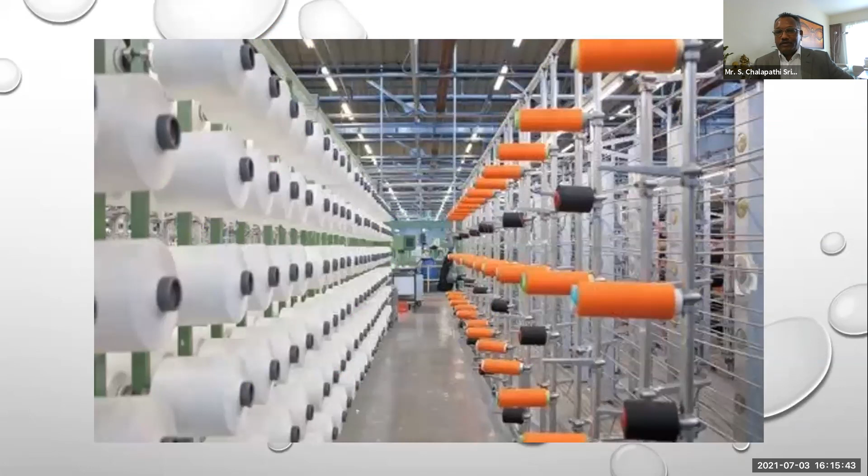Just a few glimpses of the textile industry I wanted to show in the pictures. So if you see, the first slide is about a good factory working, but the same factory, if we don't have the right type of loss minimization methods used, or we are not keeping better housekeeping, this would be the situation. Likewise, we have looms and we have massive fires.

The webinar basically here has a background to a recent fire claim which happened in Pakistan. And this fire claim had a massive impact on the economy. When I say economy, definitely the owner of the factory would have suffered a loss. But each factory, each industry supports the economy. If there is a loss in the country, the loss is to the country. This is how we see it.

And very similar fires happened in Bangladesh as well in the last 3-4 years. Luckily, in the Pakistan case, there was not much loss of lives, though the property damage was extensive. It jolted the entire Pakistan textile industry, in fact. In the Bangladesh case, we saw there is a major loss of life. In fact, a lot of women folk lost their lives because the industry is predominantly women oriented where the textile manufacturing is reported.

So what makes it so gullible?

Okay, thank you, Chalapathi. And I put my presentation up on the screen. Let me see. I'm afraid I cannot find my notes. Yeah, so Mr. Lobo is there. We can see the slides. Mr. Lobo, Usman will handle your presentation. Okay. You can stop sharing, I think. Can you put up the slide? Usman is hosting from his side. Okay. Yeah, please. Wait, George, sir. Can you put it on slide mode if it's possible? Yeah, thank you. Please, Mr. George. I was looking for my presentation. It's on the screen. No, I don't see my Word file. Sir, can you start from this slide? It has been converted. Yes. Okay.

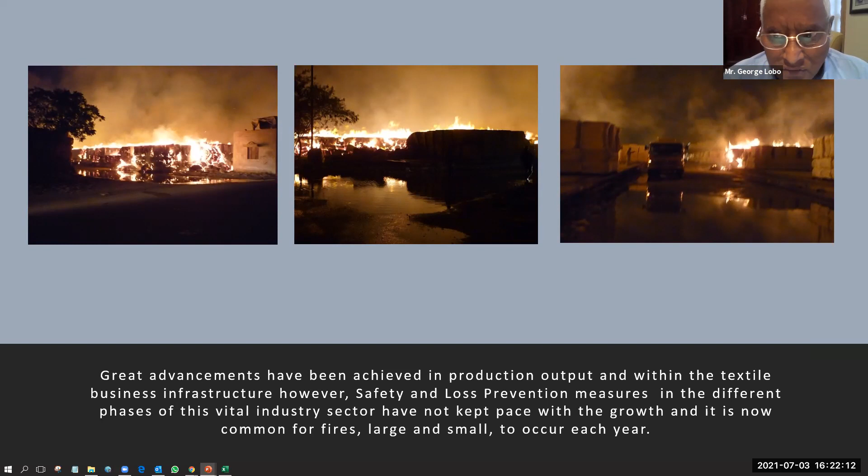Well, what I've said is that there have been huge advancements in production and various other aspects of textile, the whole industry, refinement in the industry. But sadly, safety and loss prevention measures have fallen behind. And every year we see fires, some large, some very large, almost the biggest in the world, and some small. To mitigate these losses is of a common interest to insurers, textile mill operators, and all stakeholders in the industry who contribute to different aspects of the industry.

What has not kept pace with the growth is risk management. And risk management points out various shortcomings and flaws that exist in the industry. So the way to address that is to have periodic risk inspections by a surveyor experienced in the industry and point out various shortcomings that need to be addressed. Now, this starts all the way from ginning, when cotton is brought in from the field to be ginned. And there are fires every year in the ginning industry, every single year.

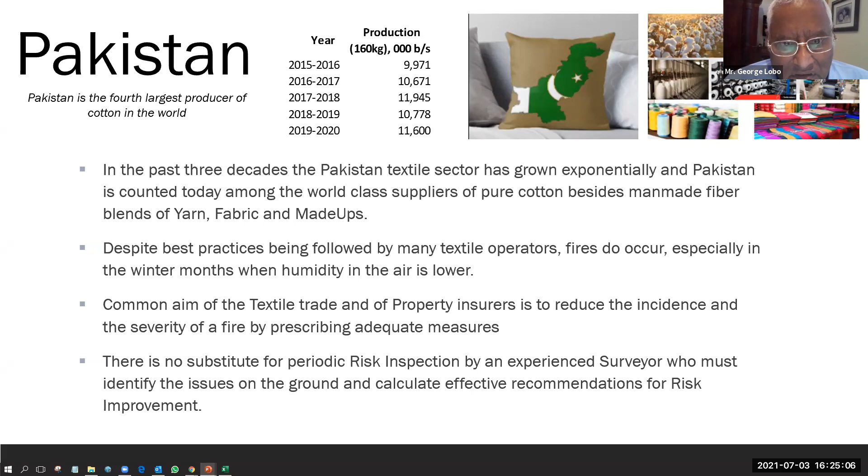Now, there are numerous means to mitigate those losses or to prevent them. And industry experts, the association, the Insurance Association, Fire Preventive Association, and everybody else, they meet sometimes. I would like to see more frequent meetings and exchange of ideas so that you come up with solutions. So risk inspections are the key to identifying the problem and the measures that should be taken, with all industry stakeholders, including the textile mill people, to sit together and devise ways and means in which to reduce those losses or eliminate them.

Now, does anybody have a specific question, or will this come later? Hello, Zulfikar. We will continue with the presentation and we will have a question answer session at the end, hopefully, sir. Oh, at the end. Okay. All right.

Would you like to continue? Yeah. Thank you so much, Mr. George.

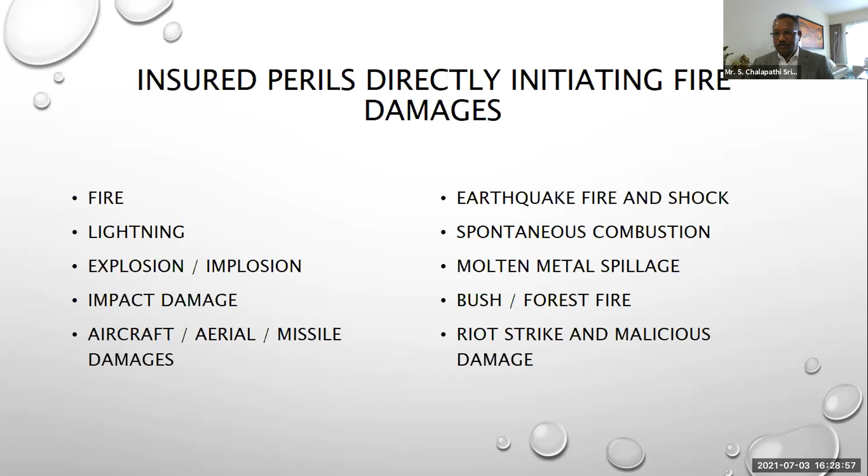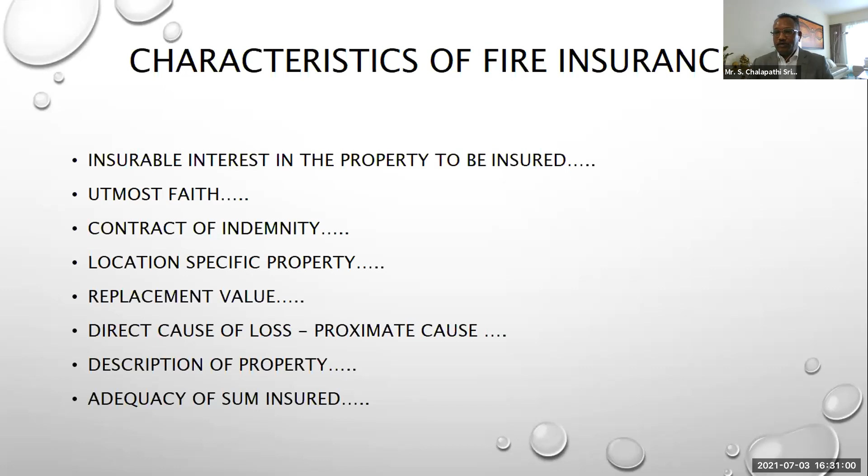There are few points which I would like to discuss, but I just thought, let me take the next panelist to start with. I have Shri Mahesh. Just a minute. I would like to give a brief introduction of Shri Mahesh. Shri Mahesh is a good friend of mine. Thank you, Mahesh, for accepting my invite and joining with your colleague, Ashton. You're welcome, sir. Thank you so much, sir.

Shri Mahesh has been in the market for 15 years, and he has been in Saudi and in Dubai for a long time. Shri Mahesh owns the business here in Dubai and has been very successfully running this whole surveyor setup. Millers is one of the very well-known and very reputable surveyor companies in UAE. He has handled huge projects, huge losses, and what I appreciate about Shri Mahesh, because we worked together on a few claims, is his loss mitigation methodology and education.

For every survey he has done, he has told the client how to take care of it for the next time. Very few surveyors come up upfront and tell the client that if you take certain precautions, you will see either no loss or less loss. Definitely for a surveyor, it's not a good business if there are no losses, but the industry should not suffer, because losses definitely will happen. Unfortunate situations always come up. But a very reputed, knowledgeable and experienced surveyor like Mr. Lobo or Mr. Mahesh educates the client very intensively. They tell them what precautions they should take next time so that we don't see similar losses at least. So I welcome Shri Mahesh and I request him to start his presentation.

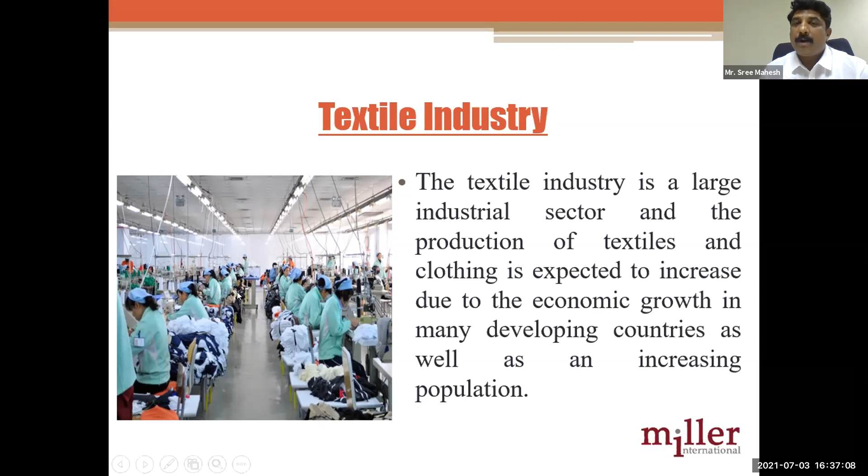So when you talk about the textile industry, as we all know, textile is a demand which comes in day-to-day need, and the industry has been predominantly doing well, with a lot of demand in the market. As rightly said, as the demand goes on, very little concern is given to the risk management side of it. So what does a textile industry actually consist of, how is it transferred? The composite unit of a textile industry is spinning, weaving, dyeing, finishing, and garment manufacturing - these are the major core things which essentially become the textile manufacturing process. Before spinning, the ginning process is one major factor which Mr. George was explaining, where the risk for insurers is too much and there's very little exposure.

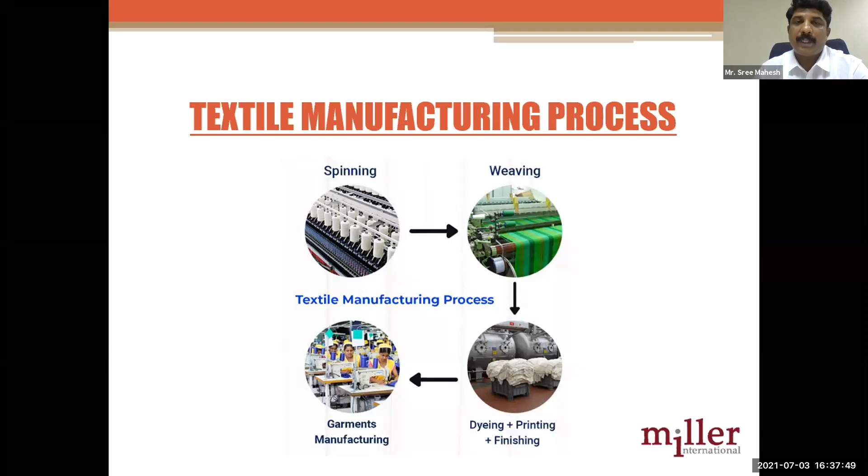How those fires or any sort of accidents can be controlled? Ginning is nothing but the fiber taken out from the field, which has been sorted out and sent to the next course, that is warehousing in a textile industry. So a textile industry process cycle - this is how it starts. A fiber is nothing but what I'm trying to say is cotton. Cotton is taken from the field, transferred, the ginning process is done, moved to a spinning yard, from where it's converted, goes to weaving and knitting, then to a wet process, and then garment manufacturing is done. So the flow chart itself speaks for itself.

Each and every process in a textile industry is hazardous unless it has been monitored well, or secured well, or if there is no proper risk management effort taken. I think there is going to be a disaster. In the recent past, we always come across news that textile industries in Bangladesh catch fire, with so much casualty. There were textile industries in Pakistan which were on fire, with so much casualty.

We should ask why these casualties have been happening. Is there anything which we are generally lacking? So at last, there is a loss, and who's protecting them? When an owner has been protected by the insurer, I think it becomes an insurable interest, or the insurer's right to know with the manufacturer what are the risks involved and what steps can be taken to make sure such accidents don't happen in future.

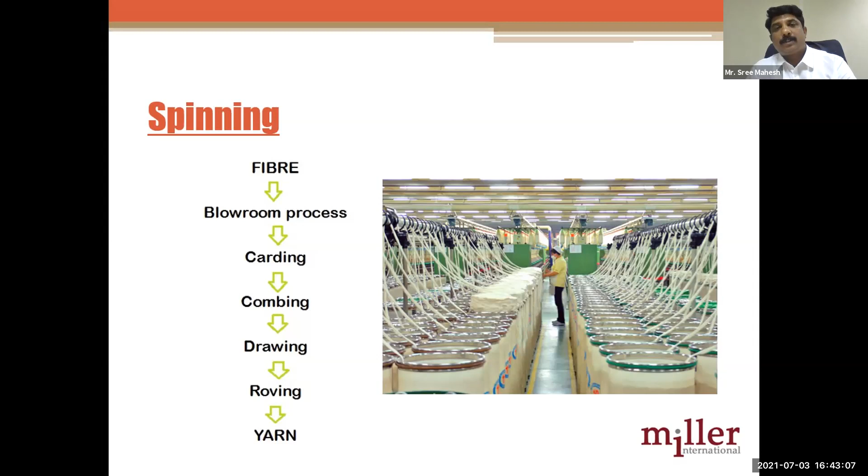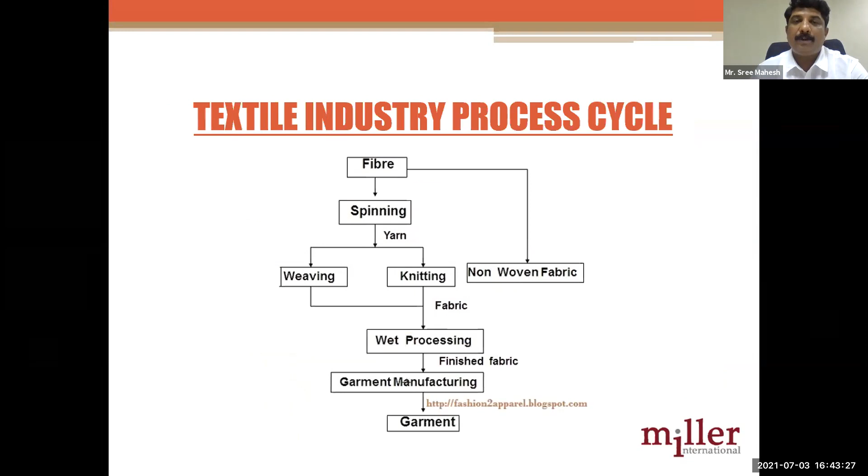You have your weaving section where electricals are a major concern. These are the various processes involved, right from fiber to a garment being manufactured. There are various cycles, machines, or processes involved, and I see there's a major risk in each and every sector. So as an underwriter, it is very essential to be elaborate on what you write, and know what the factory is actually doing. This is the basic thing which I think increases the risk of fire.

As I said, in a blow room you have loose materials, you have fluffies which blow around, and even when you open up a layer of wadding, it all creates a lot of potential losses when it gets ignited. So this has to be controlled, and how it has to be controlled is a risk management sector which has to be implemented or secured to make sure that doesn't happen.

Deposit of fluffs and dust flies - these fluffies are light and can fly. Any blow room has a light fixture or electrical connection running across, and if it's not maintained well, this dust gets deposited and later heat gets transmitted. This becomes an ignition point for fire, which easily moves on or spreads to a vital area, and the whole industry or sector would be affected.

The other risk factor I see is oily fibers. When you speak about cotton, it comes along with the seed. When there's no proper segregation done at the process or separation level, the seeds may still be within the cotton in the bales. And if this creates contamination, there's again a chance of fire which can happen.

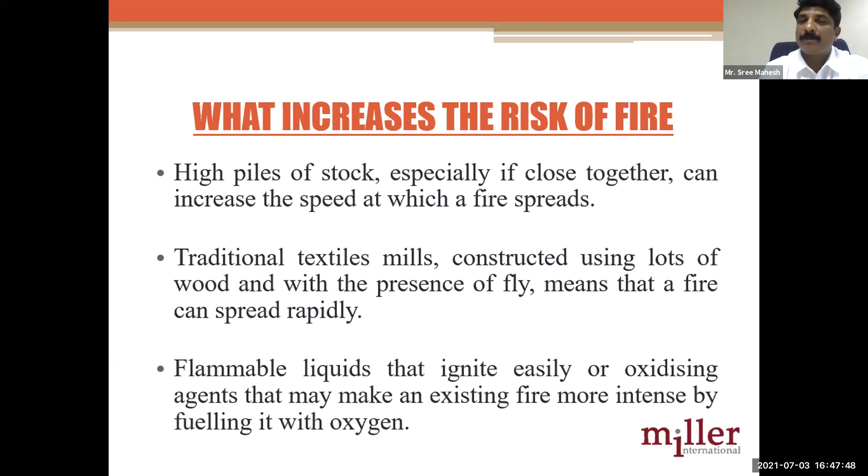I think in all aspects, education and going through each and every process is very important for an underwriter, as well as for an owner of an industry, because he doesn't want to have a fire tomorrow and just wait for the insurance to pay it later. As Chalapati was mentioning, only when we come to the factor of underinsurance, or an insurable interest, does the negotiation and discussion go on and end to nowhere. So just to be protected, let's take the first step of awareness and be educated on all the aspects we follow.

I've also identified the process of high fire risk within the textile industry. Opening and carding - we always say the bales have to be opened and then taken into the blow room. But in certain factories, opening and carding is done in the blow room itself, which is again an essential part. Opening and carding has to be specifically monitored.

There are high chances of a fire spark arising from these activities. Foreign bodies - when your ginning process has not been done properly, everything gets stacked and sent to your warehouse. You see dust accumulations, and there might be some metals from the field that become part of the stacks coming to the factory. What happens? It produces frictional heat on a day-to-day basis. This, combined with natural fiber, becomes a fire triangle, and that also results in a fire. So this has to be well monitored before anything comes in.

Opening rags is a vigorous process - with the industry being very busy, operations have orders from the manager to move the stack and do the blowing process quickly. Everyone wants everything done quickly, but such things are very hazardous in a textile industry. Even opening up rags in a vigorous process is one of the essential causes of fire in a textile industry. These are things we don't give concern to when we're really into operations. We're just there as an owner wanting to make money - there's a commercial order, you take a commercial decision, and everything goes on. But there are little things to be taken care of to avoid casualties.

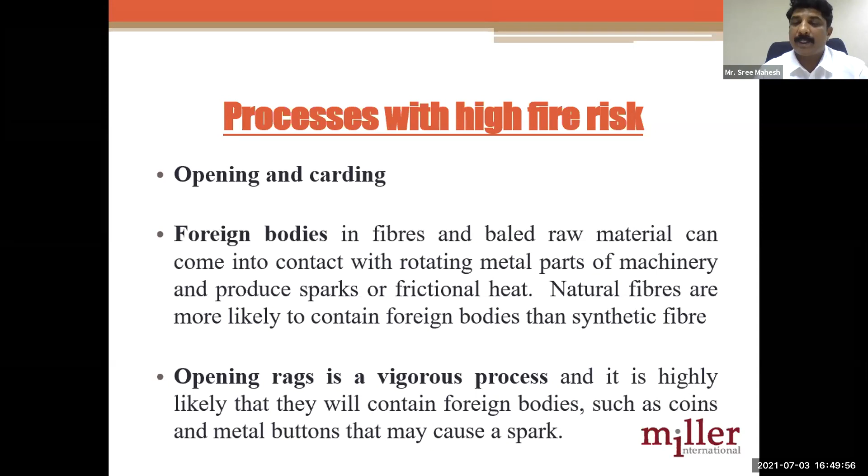The main factor is people die in fires. That's more important - we have to be very careful that we're talking about human beings who have been dying in fires. So I think it's important for anyone to be more essential about taking care of risk management aspects. The next point I would say is the opening machinery.

Electrical wiring is one major concern in any fire, irrespective of industry, and especially in the Gulf region, short circuit is very common. On a big fire, we always end up saying it's a short circuit. Why? Because little care is taken on the electrics. Electrical wiring has been there for 15, 20 years with no much maintenance done. There's an exposure - insulation failures have been happening. But only when there's a fire do we all come across and say, 'I would have maintained it if I would have known.' I think it should have been much better - you take prior action on these things.

In the Middle East, there's a warranty specifically mentioned in all the underwriting policies - they say the electrical wiring has to be maintained and there should be an AMC contract. I think for an underwriter, that's a good judge, and it's more essential, at least to prevent losses.

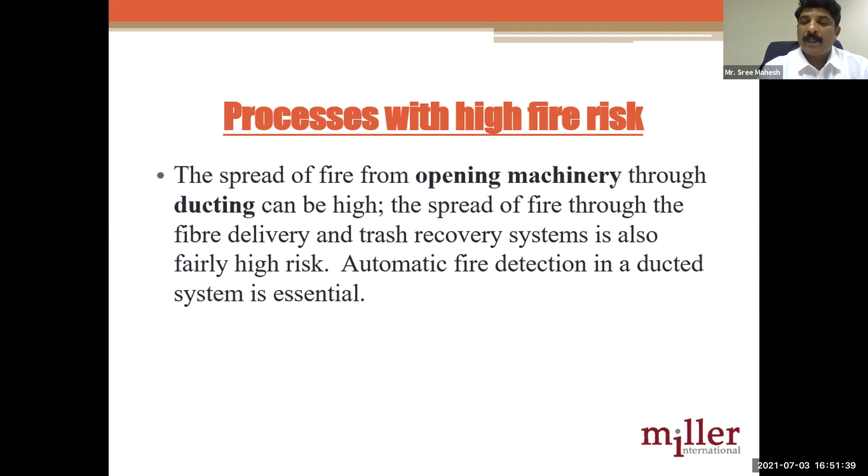With the technology being exposed - you have sprinkler systems, or any other system installed - even these can result in a fire; we're only talking about a massive fire. We also come across risk of water damage and many other things that happen in the region. So primarily, all these things come down to how you monitor your business, how the insurance company sees the risk, and what efforts can be taken. As Mr. George said, it is much more essential, before you write a risk, to send someone to inspect it, make sure it's all secured, and then insurers start writing the risk.

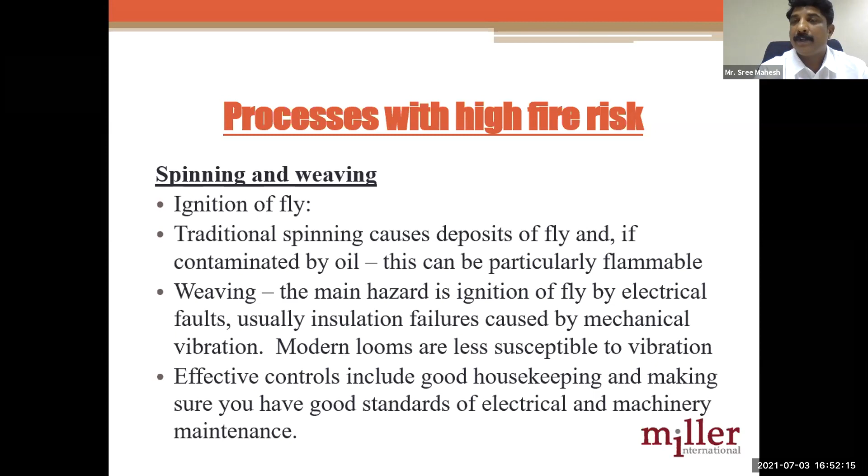Finishing process. Once you're done with all these, what we see here is that in each and every process there is something or other which can result in a fire. So it is a high-risk thing which underwriters have to be very open-minded about, and see what are the factors which can be improved to mitigate losses so they don't happen in future.

Even in the finishing process, you have the ovens or the stenters used for thermal bonding. There's a machine which is used generally for heating and drying operations. There's always heat which gets generated, and you're with the fabric. And there's always a saying: when cotton is with fire, it is highly likely that anything can happen. So every process has its own fire characteristics. So how could that be prevented?

So prevention, protection and risk management are very vital for any insurance industry or underwriter to be aware of. As we rightly said, proper stacking and storage is one vital thing which has to be taken care of. Storage and stacking, bales and bale handling, this is more vital. I'm from India, from an area called Coimbatore. It is very close to Tirupur, which is quite known for garment manufacturing industries.

We just go across and we see smoking zones created in textile industries. You have no smoking signs, but you see people smoking there. This is because there are no proper management rules or regulations followed by the owners. However, strict implementation can reduce the chances of fire. Strict training for the staff to make sure that their handling process has been well maintained, well done.

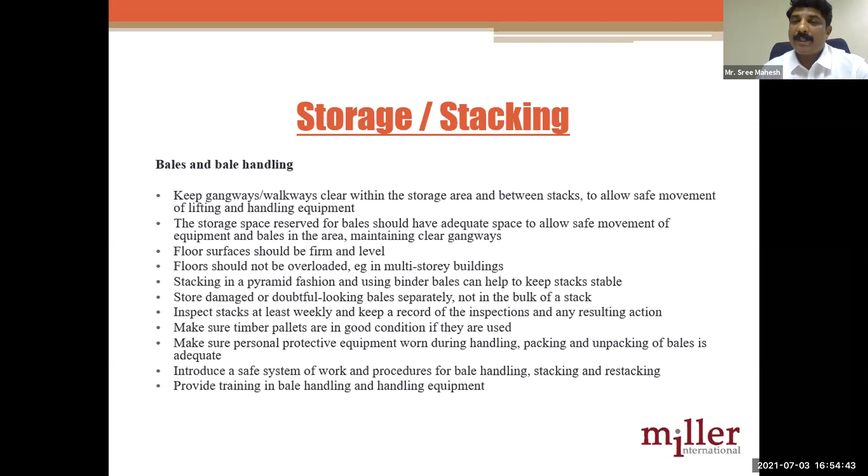So it's more important to have a risk inspection done before you write a risk and identify if it's been well maintained, housekeeping level has been kept high, electrical wirings have been checked every day, staff awareness, no smoking signs, and more importantly, how the firefighting system has been improved.

We had a classic example, because one of the major fires which I dealt with was for a paper factory. Once the fire was there, the next time there were fewer insurance companies who really came up to write the risk. But the insured took some special interest. He installed a fabulous firefighting system. And I was asked to go for a risk inspection because I had done the fire claim, so they knew that I might know much better.

I went back with a very good report to the underwriters. And believe it or not, there were a lot of insurance companies who came forward to insure the risk. So that shows the interest which mutually has to be put forward by the insurer and even by the insured. So I think it's a mutual understanding and effort to be taken.

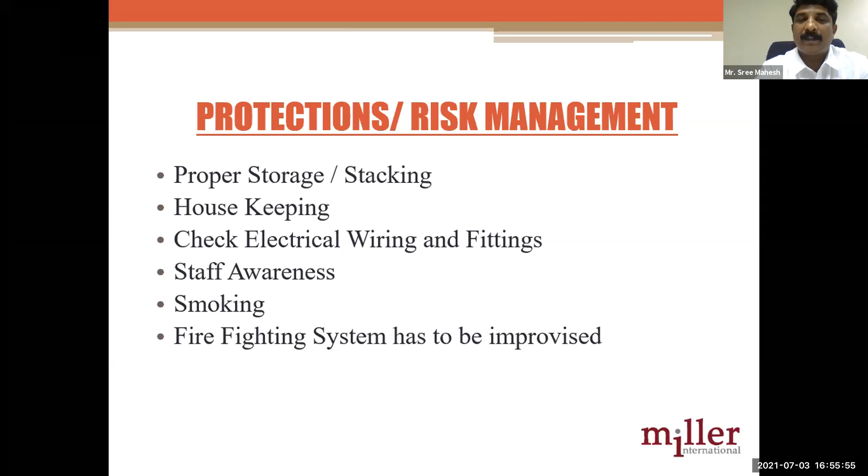So, Sri Mahesh, in fact, because you talked about this particular fire loss, I just thought, should I request George also to give a live example of one of the fire situations? I would appreciate it, sir. Yeah, please. George, can you give us a scenario of a live claim which you have handled, a major one in Pakistan, for the benefit of all our members?

I think you're on mute. Yeah, thank you.

We've been talking about bales. Well, I'll tell you about a fire in bale storage. We have in Karachi what is called the TPX, Toll Produce Yard. And we have a public sector corporation that had over 140,000 bales stored there. The fire, when it struck, burnt for almost 3 weeks, 2+ weeks. 110,000 bales went up in smoke. That's a lot of cotton.

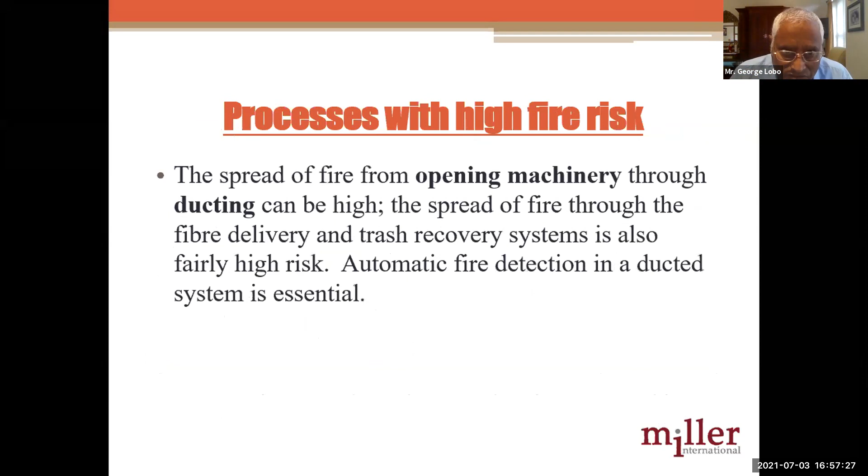So everything was lacking. Firefighting, approach to the plinths that were on fire, various. So that particular fire is one of the largest in my memory. So that's what I would mention. As to fires within a textile mill, we see them very frequently. And fortunately, there are firefighting measures in place now on a much improved basis compared to, shall I say, even 10 years ago.

With the result that fires now in textile mills are usually in storage. A process fire is taken care of; the more conscientious spinners have got fire prevention at various stages of their plants. But storage is always a huge hazard. And because of maybe the construction of the warehouse, when cotton is stacked inside at the peak of the season, it goes almost to the roof. No place for firefighting.

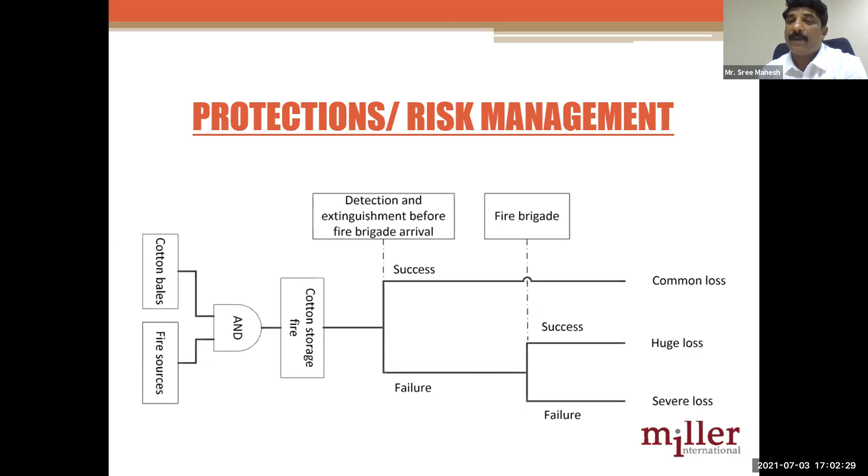It happens sometimes that they write a risk which they have no knowledge about. But I think it is vital to have a little knowledge on what you write and what you take forward. It's easy when it comes to claim handling. It's easy for an adjuster to explain the process and why it resulted so far. So I think this is primarily what I wanted to bring in during this discussion. And if you have anything to ask, I'm quite happy to answer it.

Yeah, thank you so much, Shri Mahesh. In fact, I have a few questions coming up. One is for both George and Mahesh. Akhtar Kudus has requested an answer: there has always been continuous conflict in priorities between the underwriters and risk insurers within the industry. How do you convince the industry leadership to take a long-term view on the competition and the safety conflicts?

I think for any industries, or as an industrial owner, insurance comes as secondary. It has to be the owner making sure that everything he does is secured. Because the act, what we say, is once an incident happens, he has to predominantly act as a person who doesn't have an insurance. But if a person takes that effort and makes sure that everything is in order, I don't think there might be a conflict for the insurers to take that risk and write it. And I think it is easy for them to get convinced that, okay, you're writing a healthy risk.

Okay. Mr. George, can you please add your expert comments on this? Should I repeat the question? George, you are on mute. Yeah. Okay. Is that better now? Yeah. Sorry, what was that question again?

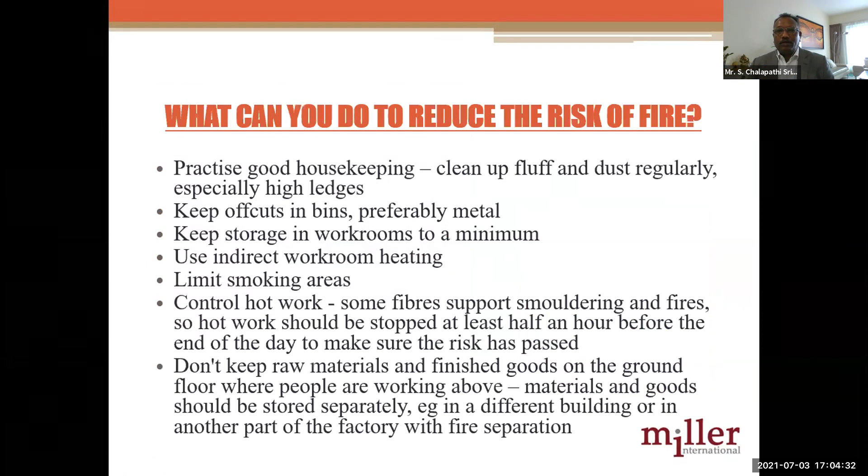Akhtar Kudus, one of the participants, has requested a reply to a question: the industry has been very competitive and there is conflict on how to accept a risk. So, keeping a long-term view, how do the insurers and the underwriters look at this sort of risk? First of all, I think the audience should know Akhtar Kudus is a chemical engineer who we consult quite often, and he's an independent chemical engineer. Right. Okay. So the question is really quite basic.

Before insuring a property, the textbook says you do a risk inspection. Unfortunately, for commercial considerations, that's not always the case. Therefore, an agent may walk into an insurance company and say, I have this client and I need this risk covered. And shall I say 4 times out of 5, the company says, all right, what's the sum insured and what kind of risk is it? And okay, here's your cover note. If safety and fire prevention are made important issues in the proposal form and at the time of applying for insurance, then

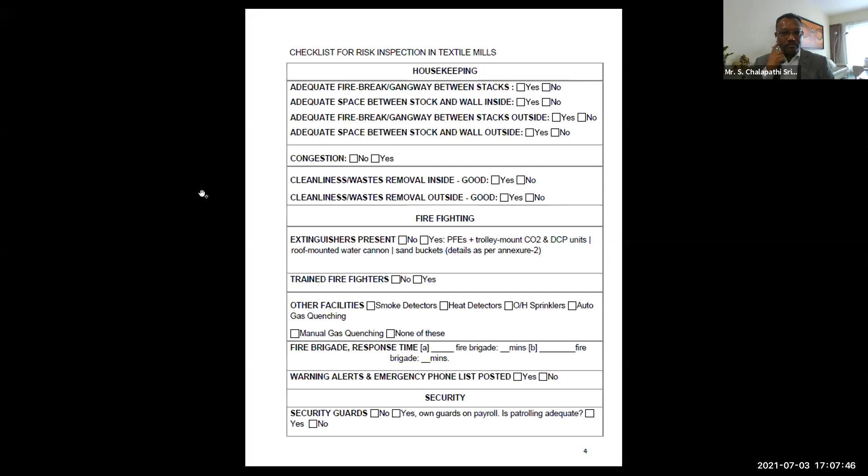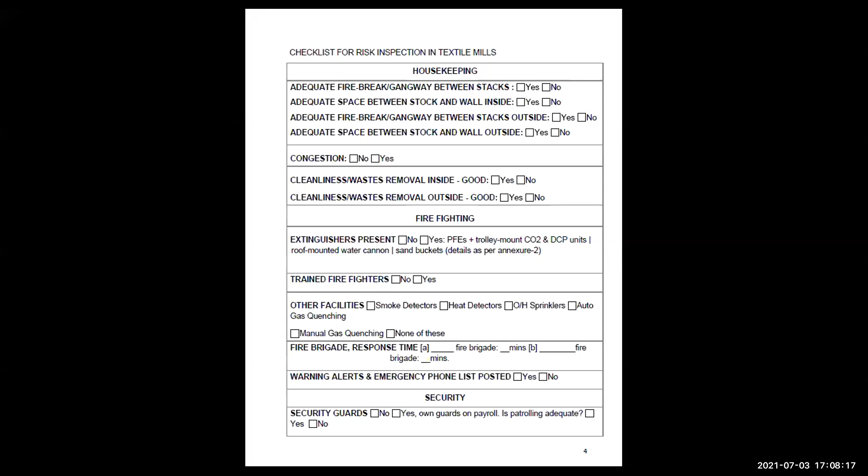So Mr. Lobo has shared this checklist with us, and he has suggested that the surveyors follow this kind of checklist, and even the customers. What he has shared is a detailed checklist, and at the end there are recommendations as well. Mr. Lobo, do you want me to go further, or do you want to share some details on this slide? Well, if anyone has a specific question, pick any of these points. Adequate fire breaks between stacks: are they adequate or not? Some insurers want 50 feet, some want 20 feet. So it depends on that particular policy.

So next is between the stack, the stock and the wall. That should be 20 feet. So similarly, right through this list, every question has a generic answer. And then if it is industry specific, because of the construction of a particular spinning mill or a warehouse, that you may not be able to stack appropriately, then you amend your recommendation.

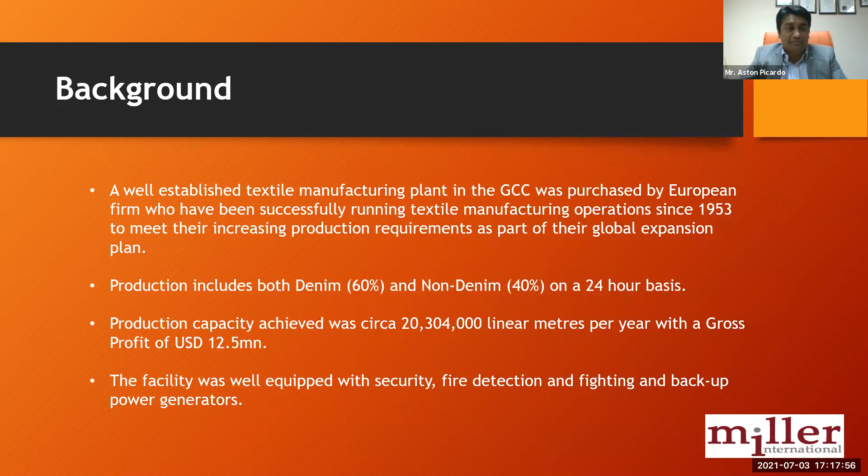Investigations revealed that the fire had originated from an electrical short circuit within the exhaust flue attaching the sizing machine. As you can see, these are typically the electrical fires that you really see. Self-combustion of bales are the other sources that are very commonly seen, and electrical fires are others that we really need to take care of because they're very common too.

If you can recall the slide that my colleague Sri Mahesh had shown with regards to detection of fire, I think that is always a very essential part of mitigating a loss. Now, in this scenario, the fire had started at the roof level, so it had gone unnoticed for quite some time until some of the staff on duty had seen smoke billowing from the roof. Now, alarms were raised.

Some of the staff panicked, but they had a fire team already trained on board who sprang into action and tried to do their best to attack the fire. But obviously access was a problem and they were not successful. So an emergency call to the civil defense was placed. The civil defense came in, but unfortunately by then the fire had already grown, and it took around 10 to 12 hours for the fire to be extinguished.

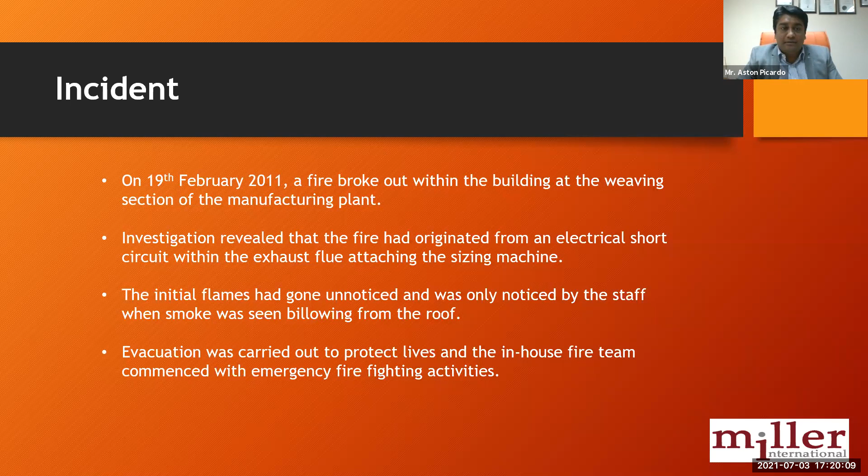Nevertheless, because of the fire loading, because of the stock within the facility and the machinery, there were flare-ups which continued for the next few days. So you can see that it was a small fire. As I said, it was a short circuit that occurred within the exhaust flue. The sparks had actually ignited the cotton fiber or fluff which had collected in the ventilation ducting.

The prevailing winds at that time actually contributed to the spread, and the embers fell onto the nearby building. That building was actually where the weaving loom, weaving machines, were installed. So once the roof had caught fire, the spread continued because of the collected fluff within the building.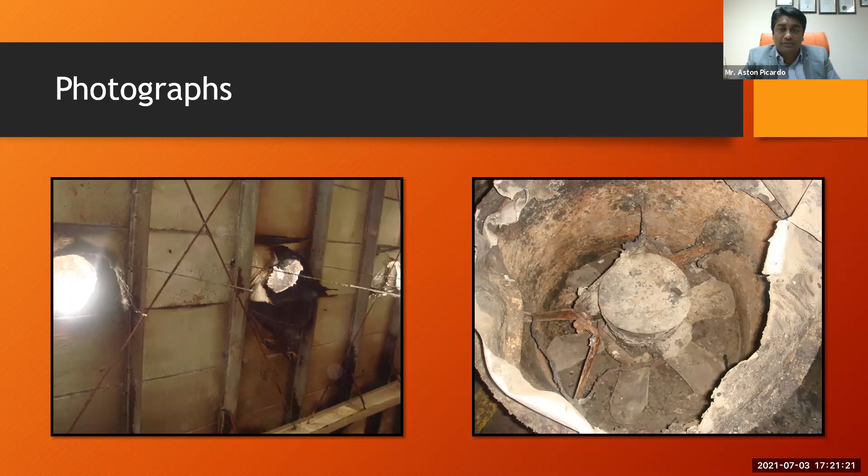Just to give you a little bit of how - if you see the first picture to your left, it shows the area where the exhaust fan was, and the picture on the right shows the exhaust fan after it was removed. This was identified by the forensic experts who came in to investigate the cause of the fire. The next picture shows a similar exhaust fan, and you can very clearly see there is a lot of fluff around the exhaust fans.

Similarly, if you can see, this is the roof area. Again, a lot of fluff was blown onto the roof and had spread across.

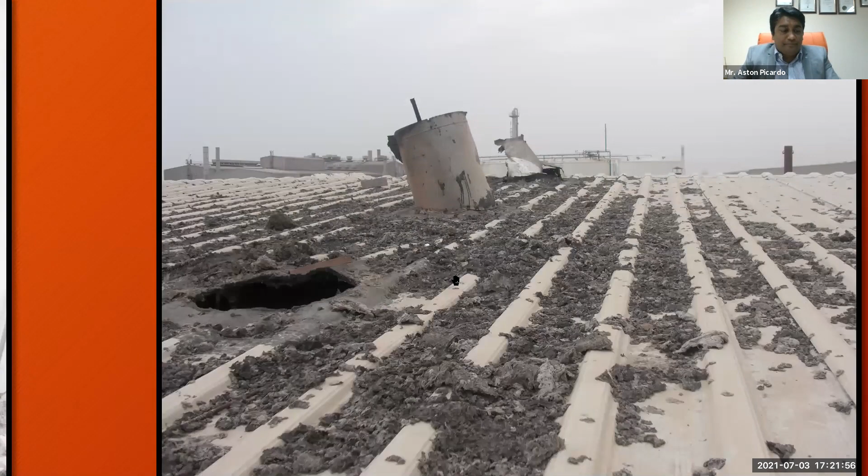As you can see, the extent of damage that the company had suffered as a result of this little short circuit was catastrophic. There were around 114 weaving looms and ancillary machines housed within the unit, which were rendered a total loss. There was smoke damage resulting in damage to the other interconnected buildings from where the soot had spread. The stock within the facility was also affected - there was stock which was work in progress, and stock of raw materials and semi-finished goods also lying in the vicinity and within the building, which was rendered a total loss.

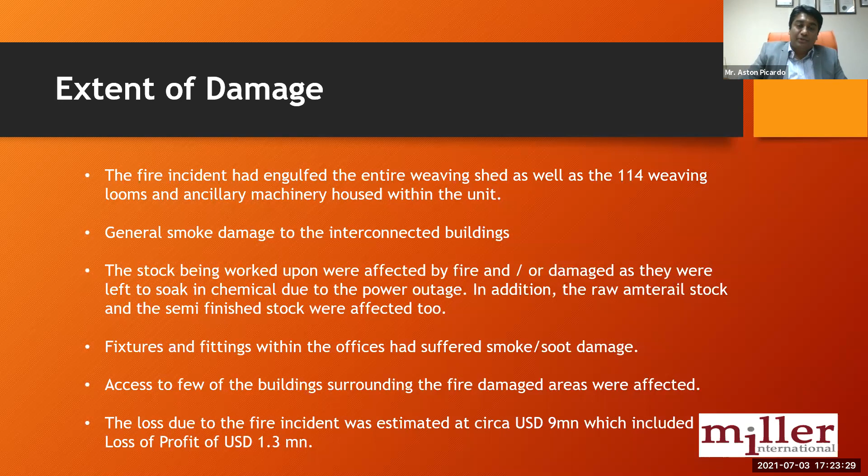Fixtures or fittings of the office buildings around. In addition, because of the falling debris, access was also affected, so that also created some kind of hindrance in fighting the fire. So this incident, which could have been quite minor if handled properly, eventually ended up being a loss of around $9 million, with a loss of profit of circa $1.3 million. So it was one of the really major losses in the region.

I would just like to show you some photographs which illustrate the extent of damage. This is the weaving loom - you can see the weaving machines all in a line, and you can see how the roof has collapsed, and there's been intense burning within the building.

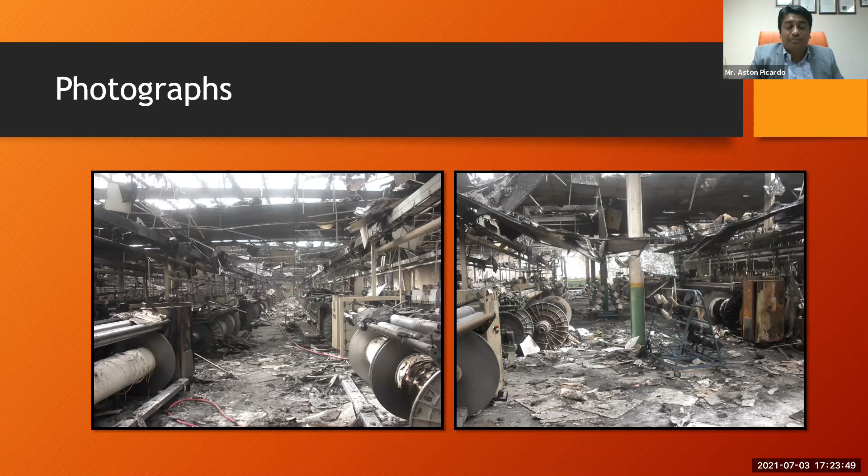This is a view from the roof. As you can see, the entire roof on one section was completely burnt out. Since the heat travels upwards, the roof and the insulation were getting burnt, and those burnt parts were falling onto the machines, and the machines were catching fire. Obviously, there was stock within it which caught fire too, which added to the damage.

Going about the challenges faced. Now, the immediate challenge post a fire incident lies primarily in the salvaging measures and the loss mitigation efforts to be taken.

There would be material and stock and also plant and machinery which would have luckily been spared by the fire, which needs to be taken into control and moved out from that particular area, so that you do not have any flare-ups affecting it, nor any falling debris causing damage to them. In addition, you may have stock which is sensitive to light, heat, and water. So those are aspects one would need to look into to try to mitigate or salvage what is left of the assets.

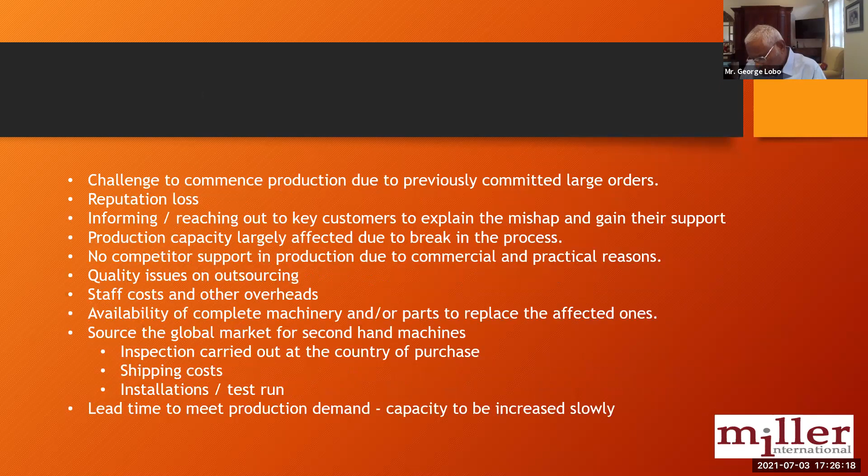Some of the other challenges I'd like to highlight is obviously to commence production, because there would be orders already in place, and those orders would need to be honored by the facility and the company. That's going to be one of the key challenges - how are you going to meet those demands, considering there has been considerable damage or a complete stop in production.

Reputation loss, for obvious reasons. If you have a fire, there are people in the chain of the industry depending on you. A fire is not something you want to have in your records. The other aspect is informing your key customers, explaining that there has been a mishap, to gain their support and understanding.

Your production capacity would be halted, and if it's one of the major lines affected, it would just be a complete stop. You can look into competitor support to gain some assistance in production, but you have the commercial and practical problems associated with it. You would have quality issues if you try outsourcing part of the production that's been affected. As said earlier, staff cost has to be taken care of, along with other overheads of the facility.

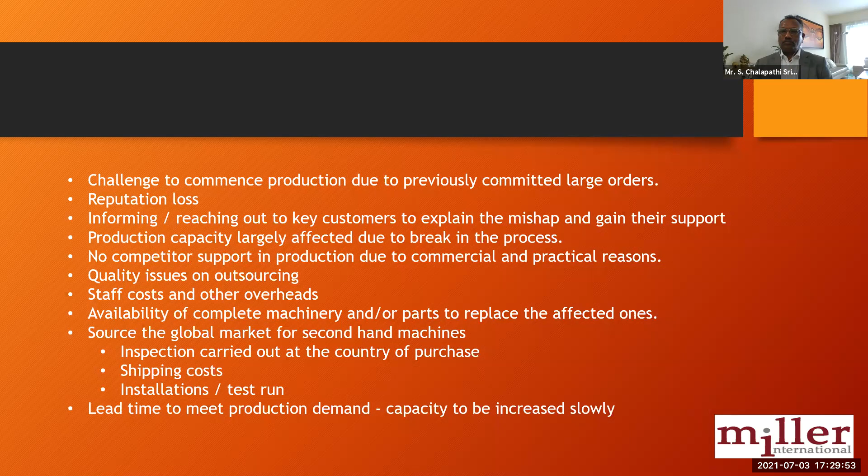Once you have procured and even have the facility up and running, it's still a process, because you are not going to be achieving 100% production on day one. It's a time-consuming process that has to be gradually increased until you reach the production you were meaning to attain.

With regards to mitigation efforts, a lot of things have to be done in tandem. This is where the expertise of loss adjusters comes into play - trying to get the right people in at the right time. You would need structural engineers to assess the building damage and give their views and assessment of what can be done, if at all.

Likewise, the OEM of the plant and machinery needs to be involved to ensure that you are able to get in the plants and equipment in the shortest possible time.

I think what comes primarily into all of this is to draw out plans to ensure that there is least interruption period. Not all companies would have a cover for loss of profits. Those who would definitely be protected to a greater extent, but those who don't would be suffering not only material damage, but loss of profits.

In drawing out the plan, one of the key aspects is to involve the floor staff into planning, because you would have the best ideas given by the people who have hands-on experience on the machineries and the processes they have been managing for all those years.

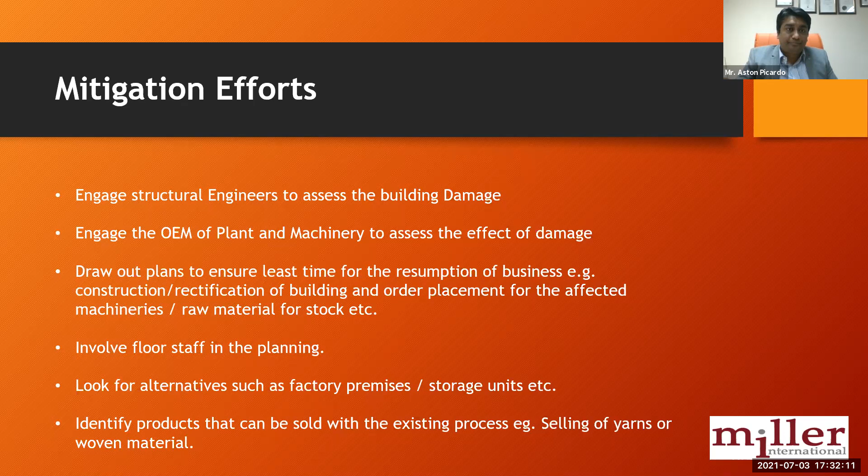Road to recovery, again, an execution team should be identified and engaged immediately. One of the good aspects in this whole messed up scenario of having a fire damage is that it gives you an opportunity to try and make improvements into the existing facility.

The company can look into finding ways of incorporating new technology processes rather than going into the same old process that they have been running for all the years. They can look into new improved machinery, upgrade their firefighting detection and protections, and also look into trying to comply with the latest construction standards as set by the local authorities. So this is a light at the end of the tunnel, I would say.

Lessons learned. One of the key lessons learned in this particular scenario is the housekeeping aspect. If it was not for the fluff deposits across the shop floor and the ducting, the fire spread wouldn't have been this major, and the loss probably would have been quite minor.

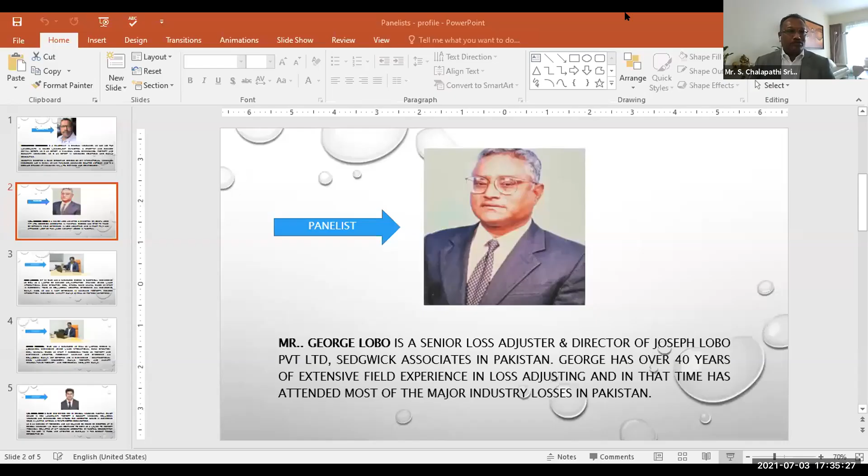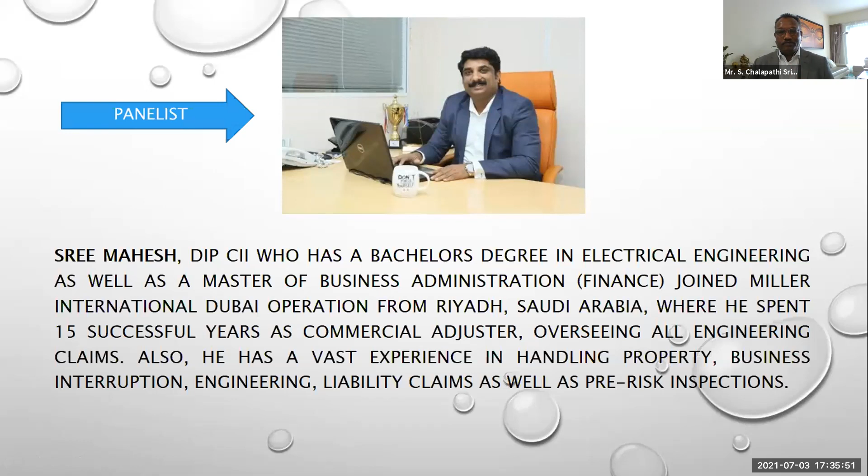I think I should introduce Ashton, otherwise Ashton will not like me. Ashton is part of Miller International, and he operates from Dubai currently. He has been in Riyadh before, like Sree Mahesh, and he has very strong experience in business interruption, engineering, and liability claims. So we have been associated with...

Sorry, I think so he has been in the market for the last 7 years, handling major claims in this region. And he has been in Bahrain before Dubai.

Thank you, Ashton. I think there was a small confusion between you and Sree Mahesh, because you both look alike also. We complement each other, yeah. In fact, if you see the chair you are using, both the chairs are similar. Yes, absolutely, I got in fact confused, the same chair, the same office.

Thank you so much, and it was a fantastic presentation. Thank you for the lovely insight.

My next speaker is Mr. Faisal Khan. He has been very conspicuous not to show himself on the screen as well, because he has been answering a lot of questions and answers when we were discussing our presentations. Thank you, Faisal, for that.

Thank you. Faisal Khan is chief... yeah, so, sorry, just I'll take a few minutes to introduce you. Faisal Khan is the chief risk officer of IGI General in Pakistan, and he's an expert in risk management, property and casualty insurance. He has been in the market for the last 20 years. He has been both with the national companies and the private sector. He is part of the Insurance Association of Pakistan, and he has been appointed as chairman for the current tenure.

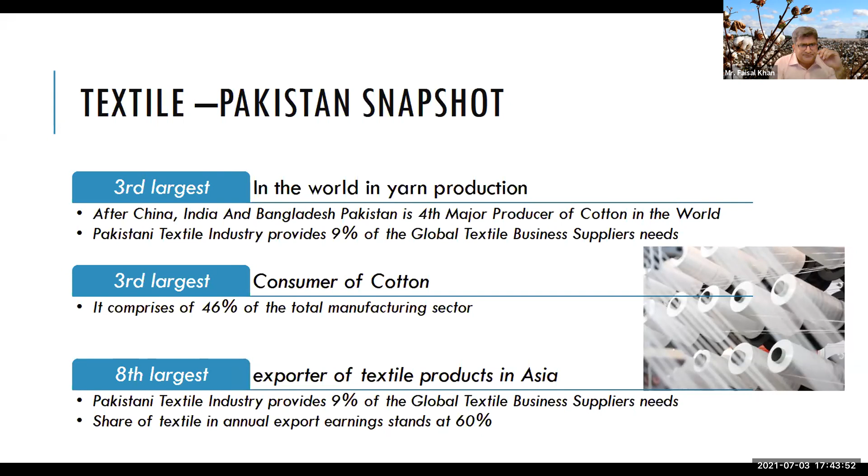I'd just like to tell you a brief about cotton. I think many of the people here would agree that they've seen nothing more dangerous than a cotton fire. Yes, there are obviously bigger ones, especially in the fertilizer or polymer sector, or the energy sector as well. But when you talk about the medium to large scale industrial fires that happen every now and then, the major culprit is basically cotton.

But then again, we need to see what's the science behind it. Here you see that almost 85% of the content we have is basically cellulose. And then you also have the waxes and the fats.

The other thing here, as you see... let me see if I can bring about my... no, I could not see the laser light, which I couldn't highlight.

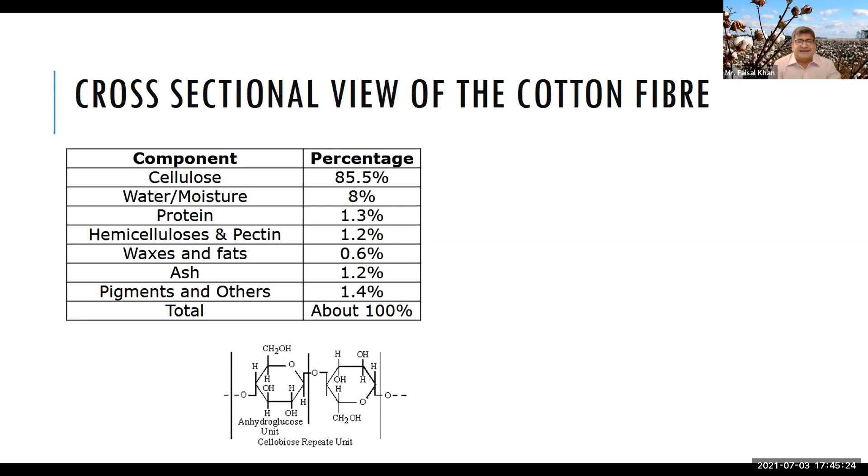But then again, if you could see the mouse here, this very molecule looks like an organic compound, an organic molecule, which is very much to the likes of toluene. People who are geniuses in chemistry would really appreciate that this looks like toluene here, and that is highly flammable.

For the property insurance business in Pakistan, I've been sitting in the property committee for some time, and we gather a lot of numbers here. We see it's almost $20 million worth of premium every year, and that is only coming from property insurance, which includes property and engineering, not marine and miscellaneous. While on the other hand, it's almost like $30 million worth of losses we pay out to the sector. So you see, I'm not the happiest man here.

And then again, though we know there's a lot of business actually coming in from this sector, we also have to keep in mind that there's a lot to be done to improve the overall perception of the business. And that is only possible when we invest heavily into risk management and mitigation in terms of how to avoid major losses.

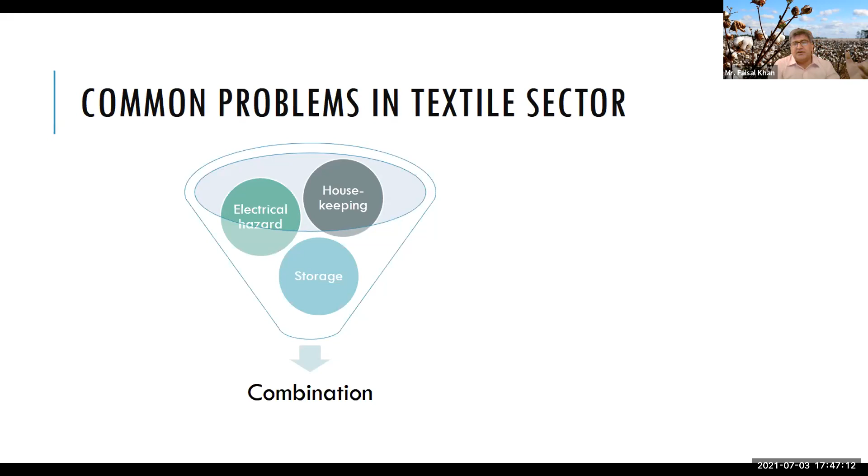Some of the common problems in the textile sector, as many of our distinguished guests have touched upon, are electrical hazards, housekeeping, and mostly storage, be it open or in the godowns. Many of the common hazards we talk about here are smoking rule violations, inadequacy of firefighting equipment, lack of hazard awareness in the workers, hot works, and hazardous material handling. These are many of the things we talk about every day, but we probably don't give the real importance to how best we can look into these and how best these can be improved upon.

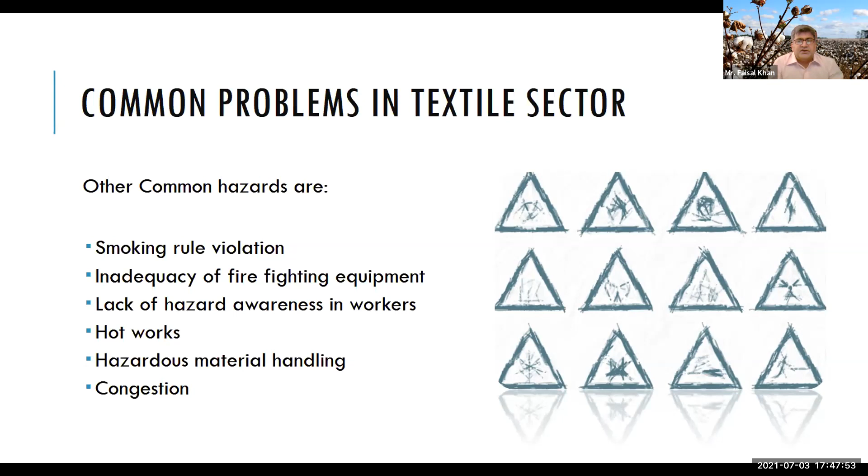You will see in some of the later slides where I have tried to gather some of the photographs from whatever surveys we have done in the past.

We talk about the occupational hazards. Yes, there is indeed a high concentration of combustible stocks, the highly combustible nature of cotton, as we see. The cotton fluff is all over the place.

The funny thing we see is when we go into a blow room - the very first time I visited a textile mill, almost 20 years back, it was the very first of my surveys there, I always just thought, why do we call this place a blow room? Coming in from the fire perspective and the insurance industry, you see something you blow. This is something you deal with in everyday life when you're in the textile business, and that is the most hazardous part, or the very first place where you have these fires - many of the big fires.

We also see many times that the textile industry, especially in third world countries where we are kind of energy starved, does not have much reliance on public means for electricity supply in some of the industrial areas, even in the larger cities. In the peak summer seasons, people tend to have their own energy production, and that is where you add more

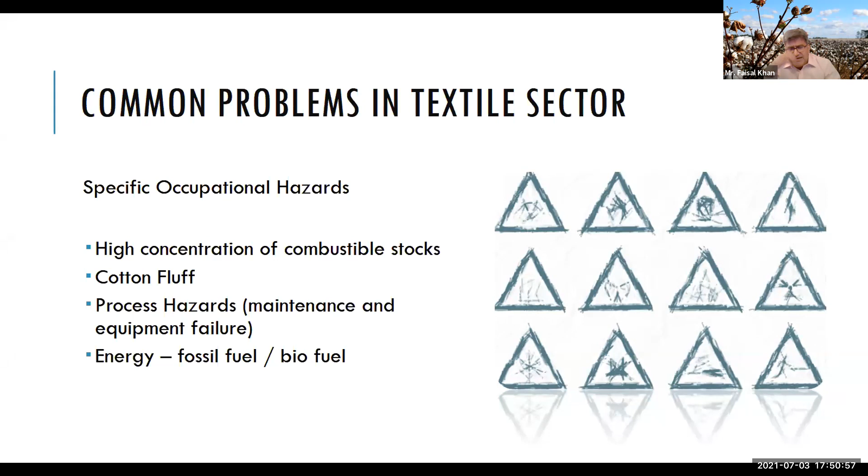So here we talk about the commodity classification per the NFPA 13 standard. It falls into combustible products with any type of packaging, including Group C plastics. So that is how you treat it when you come to understanding how this has to be looked into.

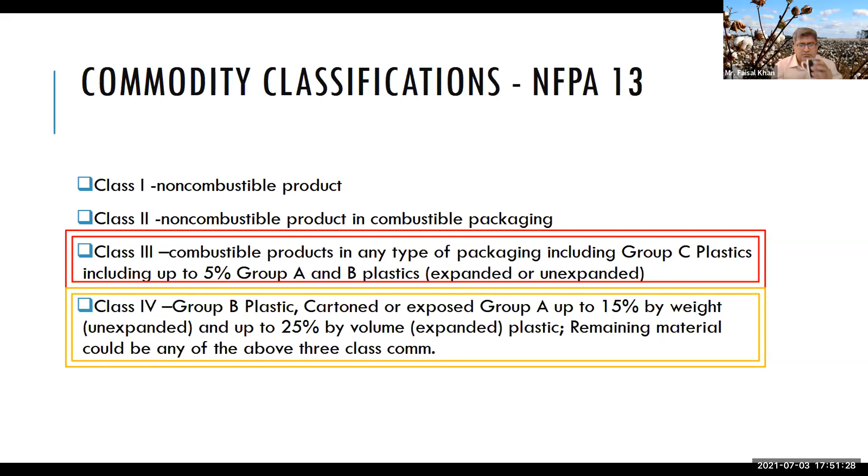Now, in this part of the presentation, we talk about the good, the bad, and the ugly. You will see some pictures of what we come across in our everyday life. I thought it's a good idea to show this so that people from the industry itself, the spinning or textile industry, would learn how some of the best practices can help in avoiding major fires.

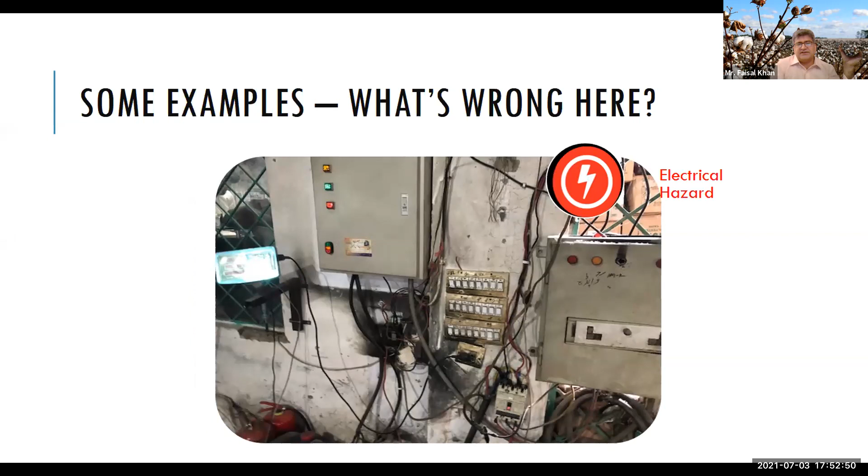Electrical hazards. Somebody was just telling us about the major culprit; most of the time it is electricity, and here we see how it looks most of the time for the medium or smaller units, which are not very keen to invest heavily. The amazing part here: this fire extinguisher is very well surrounded by stocks all around. So whenever you're supposed to reach the fire extinguisher to control a fire, how do you do that?

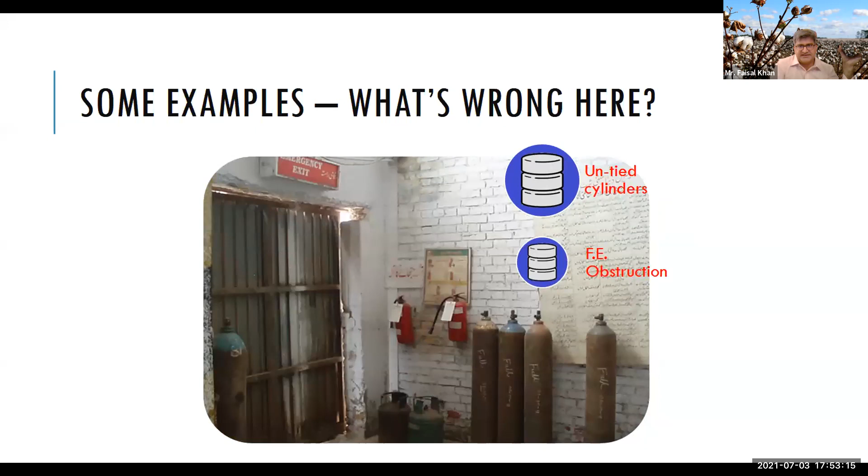What we have seen in the past is that some fires, because of cotton fluff and ill maintenance of the facility, can be ignited by an electrical surge here, or electrostatic charges at this place.

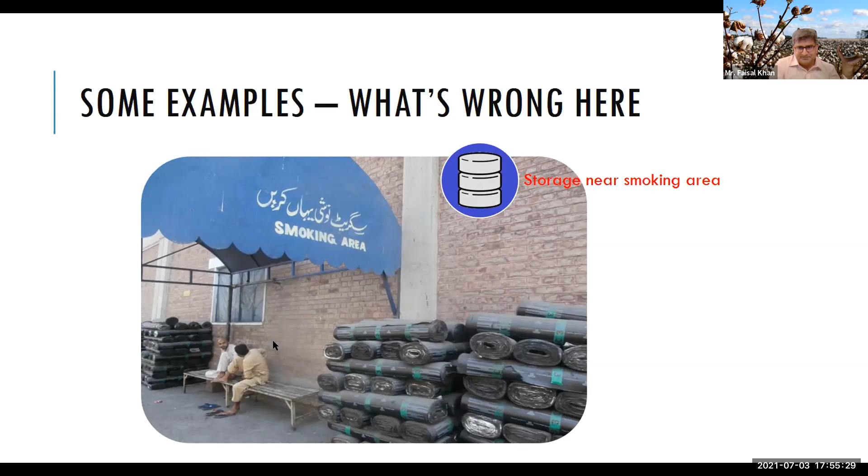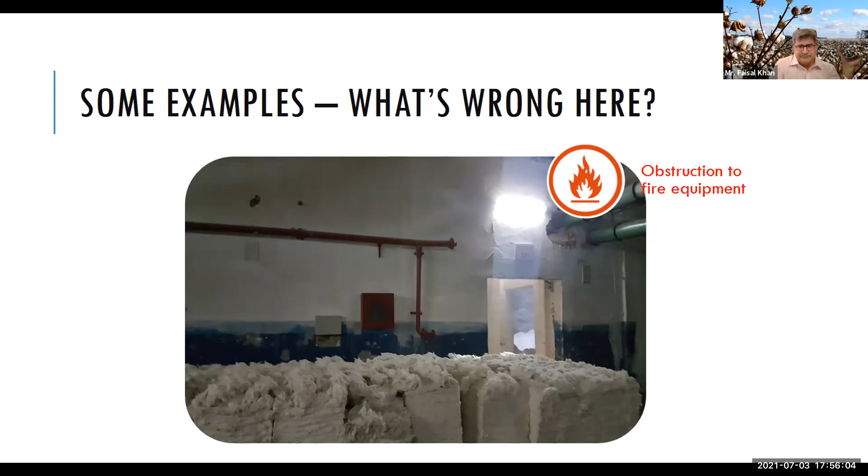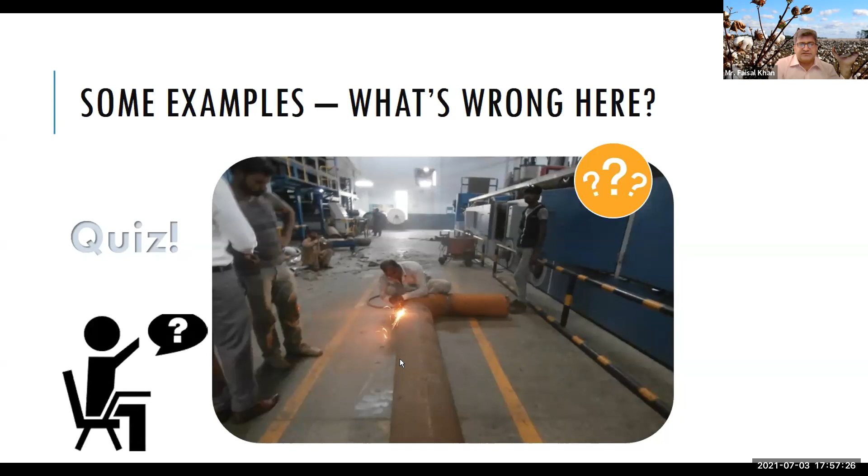And here you see how beautifully this is kept. This lubricant and the drums. This poor guy is welding in this very place. We see there is obviously a lot of manpower around, but we don't see anybody with a fire extinguisher or even a hose nearby who could control any incident. And we are seeing that this is very much part of the mill.

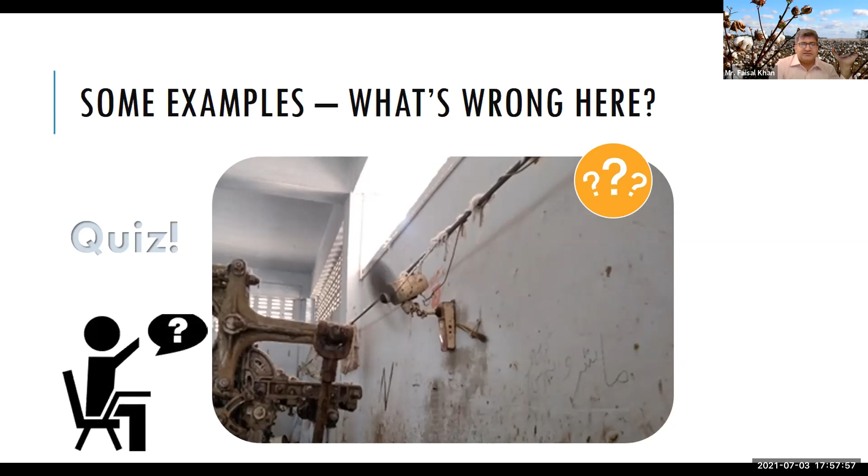Cigarette butts right outside the plucking area and the blow rooms. And a wall bracket fan, without a casing, without a housing. And you have seen here that huge fluff is just waiting to be blown into this fan. Wow. The electric lights right above these machines, and you see how nicely they are all surrounded with this cotton fluff.

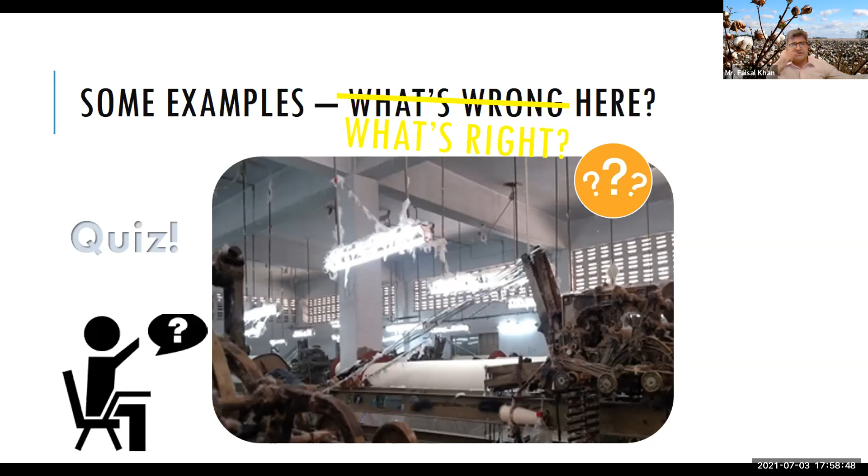Nowadays we don't have these kinds of lights mostly, because people are going into energy saving, and you have LED. But these were the tube lights with the electric chokes hanging from the ceilings. What happens is the fluff gets stuck to the chokes, and usually when you switch on these lights in the evening or even in the daytime, you see little sparks coming out because of the mechanism of how it is lighted. And then you see how this could help you catch a fire.

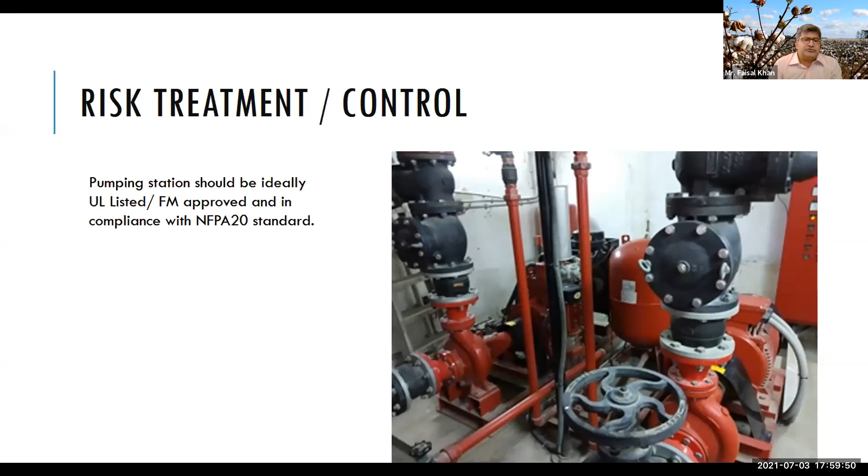The famous fire triangle, how do we treat that? The treatment is that we have the guidelines, mostly all the NFPA-specific recommendations we give. This pumping station for the hydrants, NFPA 20 standard. Most of the time, when you go to many textiles here, there was a tendency for people to get discounts for the firefighting equipment they have. But if they're not well kept and not well designed, it would probably be of no use to anybody.

So Akhtar Qudus, I just saw in one of his comments, was telling us about thermography, and that is really very important, that you have thermography done for many of the electrical appliances you have within the factory premises, so you know which areas actually require urgent attention.

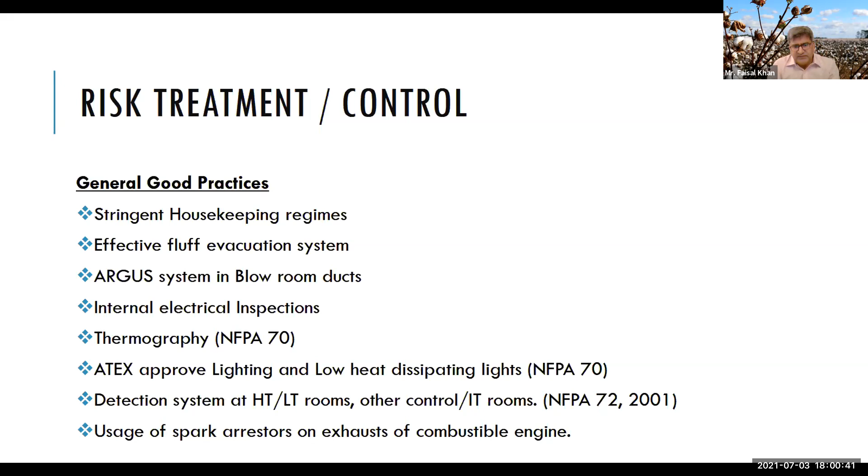Then you have the spark arresters here, which are extremely important for our industry in textiles, where we deal daily with huge stocks coming in to the site. That is what is applied on top of the exhaust pipes of the engines of the trucks bringing in the cotton stocks to your factory.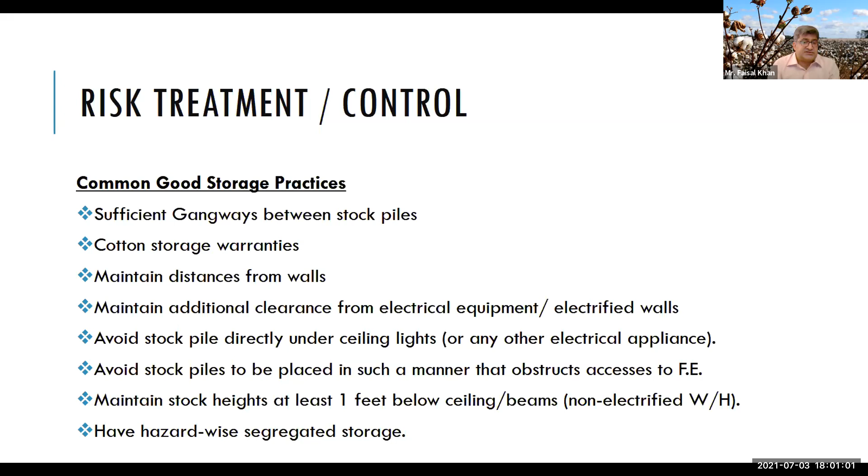Here we see a lot about the cotton storage warranties, the gangways George was talking about in the earlier part. How can we keep it? The distances are all very important. This is usually what we use here in Pakistan. The very specific warranties which are incorporated in the policies here can become a source of contention with your customers, because that is what is applied most of the time when there is a big loss and these distances are not well maintained. That is the distances between the cotton heaps and the cotton storage areas.

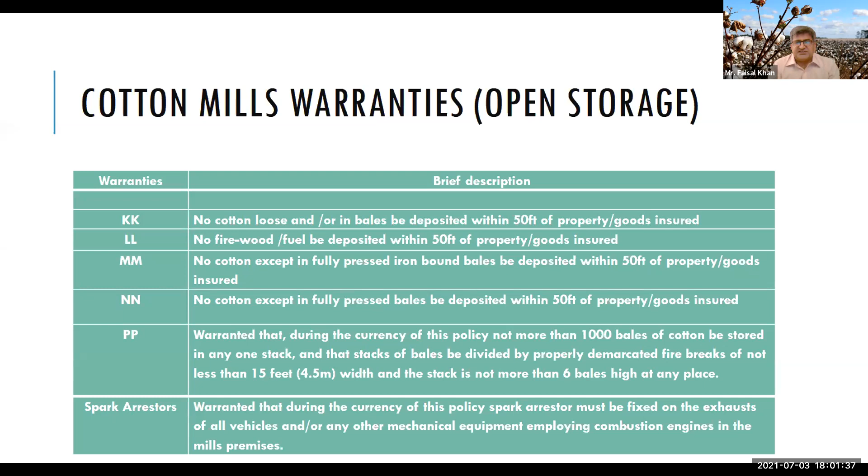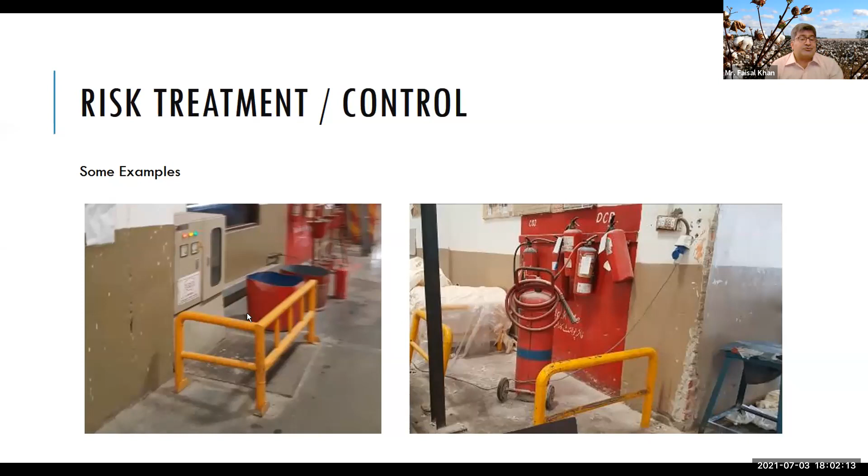Now here you see some of the good places which are very well kept, and you see how the distances are kept. Spill containment is extremely important. Keep all your lubricants contained. Always a designated area for the firefighting. Then again, don't keep anything in front which is an obstacle, so the electrical panels are easily approachable, be it the stocks or anything like that.

So most of the time, people also rely on gravity-operated fire systems, and you see at times how this would operate when you have no pressurized supply to the hydrant point. The standard says a 750 GPM fire pump is to be installed to have the pressure, which is somewhere close to 75 to 100 psi, to combat any of your fires.

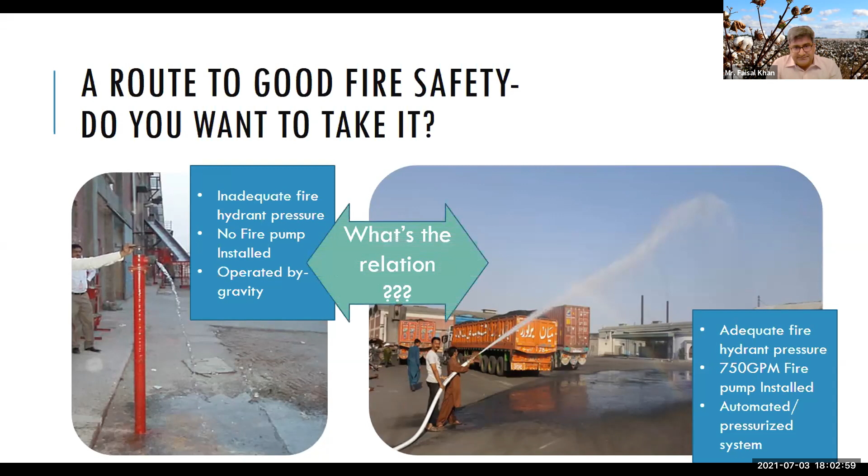That's a bit about the overall snapshot of what I could show to our distinguished audience and the panelists. So we invite questions here, if there are any.

Thank you so much, Faisal. In fact, I think the pictorial representation is much more effective. I hope some of the industry captains who are participating have picked up a lot of points here. I have two interesting questions. This is for all four panelists, and we'll make it quick because we are running a bit over our allotted time. Why is short circuit always the cause? So maybe briefly, 30 seconds each panelist.

Mr. George, you are on mute.

Yeah, short circuit. As I was explaining in my presentation, one common factor we see here is short circuiting. Like any other system, you have firefighting systems which are annually maintained, and there's a procedure which has to be followed, and some regulations in the country make it mandatory. But for electrical systems, there's nothing requiring you to do thermography or a test and maintain it. I don't think there's any code suggesting it, unless the insured, in his own interest, takes steps to rectify things.

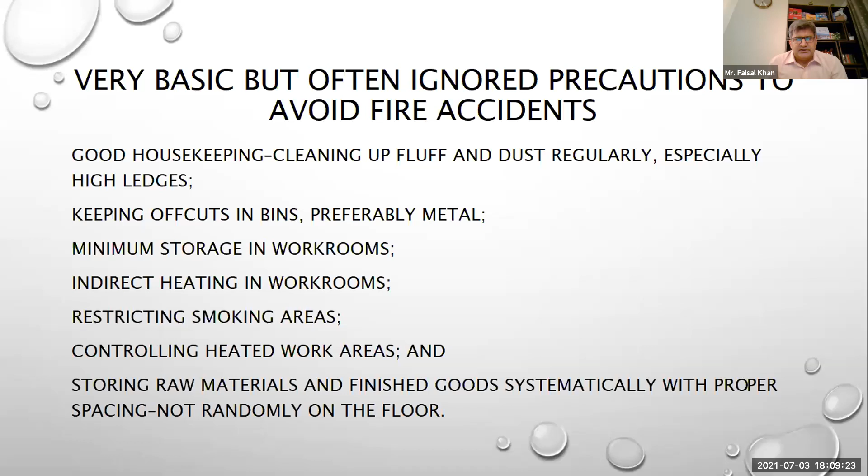Usually what we see in the industry when we go and see these clients on a real-time basis, we see that there is very little interest, usually, because this is most of the time the easiest thing to blame, as we all said, in case of a fire. The only problem we see is that we are probably not using the right things at the right place. It's not just a matter of the price. It's also to see how best this could have been addressed had we taken some time to think what kind of fitting this appliance requires.

Most of the time, what happens is that you're erecting a new unit or adding machinery. You just bring it on to your site, do all the cabling, whatever is needed, and connect it with the mains. But what you don't actually look at is the accessibility of the electrical mains at these places.

And in the industry you're talking about, there is a lot of fluff and a lot of humidity within places like the rings, especially in ring spinning, and some of the sizing and warping areas, where you need a high level of humidity. On top of that, you have this huge amount of fluff. You have the whole machine running perfectly fine, but what you don't see is how that electrical socket where you plugged in that machinery has behaved over time.

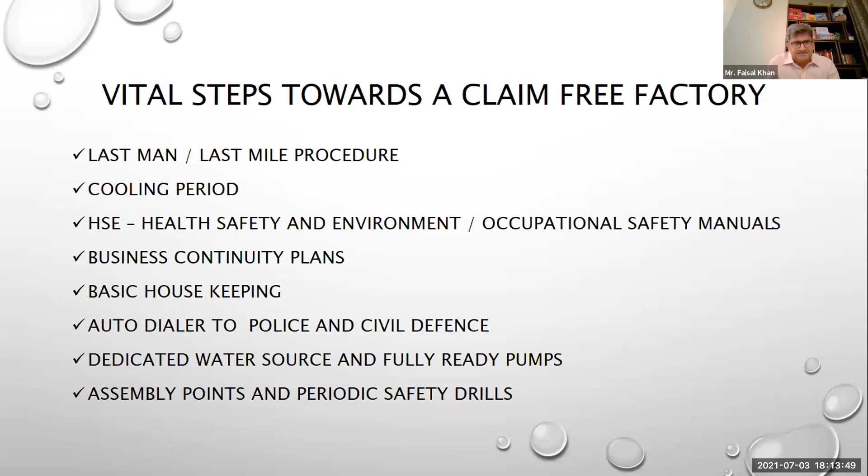So the last man and last mile procedure, especially in UAE, is now part of the clauses and conditions: that the last man has to be trained periodically.

Like all the panelists, they came up with mock drills and trainings. Every last man has to be trained, and this has to become part of the HSE program - who has to do what at the time of an accident. He need not stay there. If somebody has to call the police, he just calls the police and moves out. Somebody has to call civil defense, he just calls civil defense and moves out. This sort of procedure is very important.

Companies should have very good business continuity plans. What I see as most important is the cooling period. Some factories have 24-hour shifts, so cooling period may not immediately apply. I saw Faisal's example where there's welding going on and no fire extinguisher seen anywhere. But there's also one more factor - once you finish welding, after half an hour or 45 minutes, somebody has to go and see the welded part has cooled down. Because there is continuous activity in the factory, these are the places where fire is going to start.

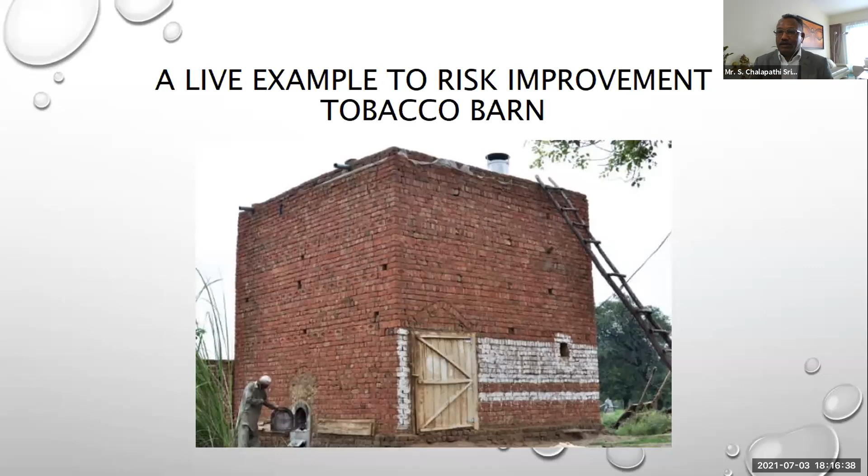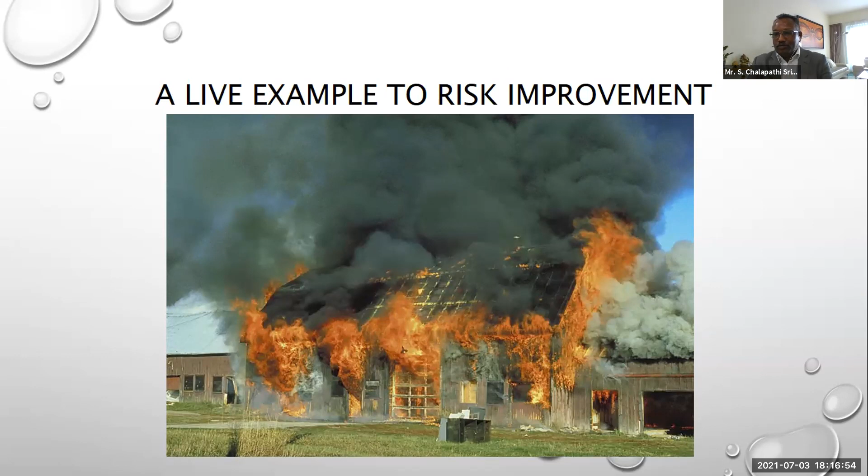Let me give them a live example. This is what I did when I was in underwriting in India. This is a typical tobacco barn, nothing connected to the textile industry, but very similar to what we're discussing. A tobacco barn is where tobacco leaves are heated or conditioned to a certain constant temperature so that all the leaves have similar color, finish, and crispiness. What happens is, similar to fluff in cotton industries, a small tobacco piece gets dried and falls on the tube, causing a total loss. The tobacco leaves are hanging and the tubes are red hot because they are blowing fire into the tubes to maintain a constant temperature in the room. So what I suggested was to put a thin mesh between the tube and the tobacco leaves.

I was in that area for two years, and I saw a drastic reduction of claims to almost 20% of what we used to have - an 80% reduction in losses in that region. And this doesn't cost much money, like how Faisal put it. It doesn't really cost money. Like Ashton said, now all things are coming at one-third the cost of what it used to be before. So it's just our effort which will safeguard the country's precious money and also the industry.

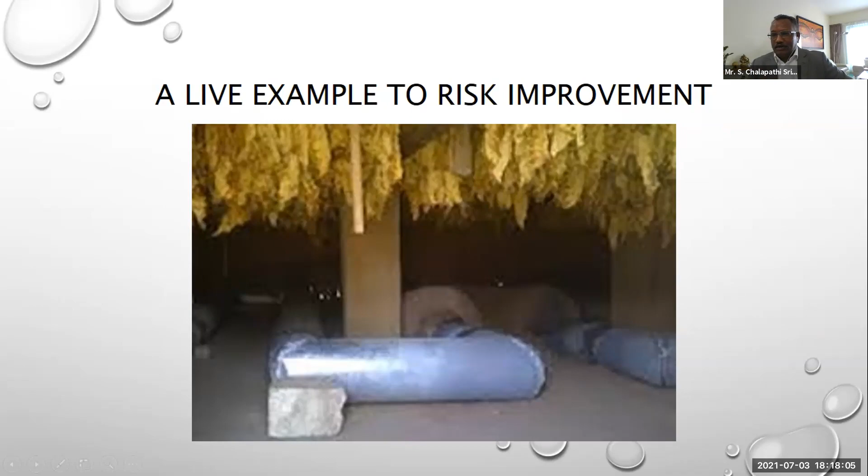I have a lot of questions, but I think we are running out of time. Should we take a few? I think we can take one last question and then we can wrap up. Okay, fine.

So Taimur Beg has a question: the client says if we have done all the precautions, then why do we take insurance? This is what we have to hear from risk managers. Should the government also intervene in this matter? Anybody can take the question, one of the panelists.

I think this is a common question any client would raise with an adjuster or insurer. Insurance is basically here to cover accidents, and any negligence can be ignored, but accidents are predominantly covered. Accidents can happen anytime, and nevertheless, even if all risk management has been done, accidents can still occur. So it is more essential to have insurance as a protection. It's not that we have everything done and say okay, but tomorrow if there's a loss, it's the owner who's going to suffer. So insurance is basically a protection given to any industrialist or business owner, so they can have a peaceful sleep at night.